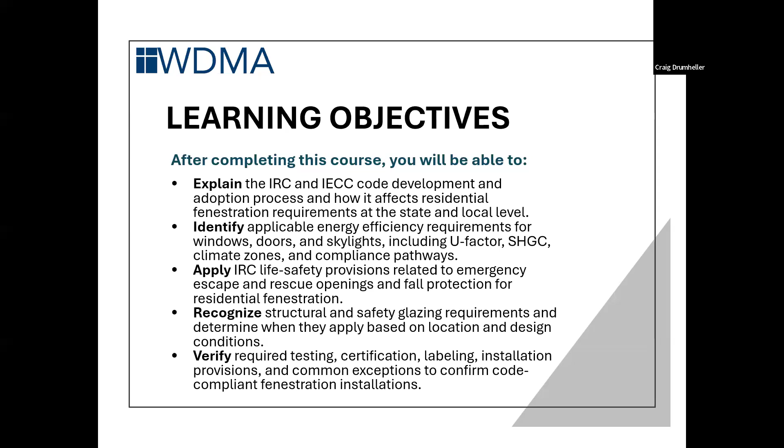The IRC covers 1 and 2 family dwellings. It primarily addresses safety, structural, and egress requirements, but it also has a Chapter 11, which is essentially the 1 and 2 family dwelling version of the IECC. However, the IECC is a comprehensive document that covers both the residential and commercial portions of the built environment. Typically, when a state or jurisdiction adopts an energy code on the residential side, they will strip out Chapter 11 of the IRC and insert the requirements from the IECC. They are virtually identical, but just enough different that they will create it as a separate requirement.

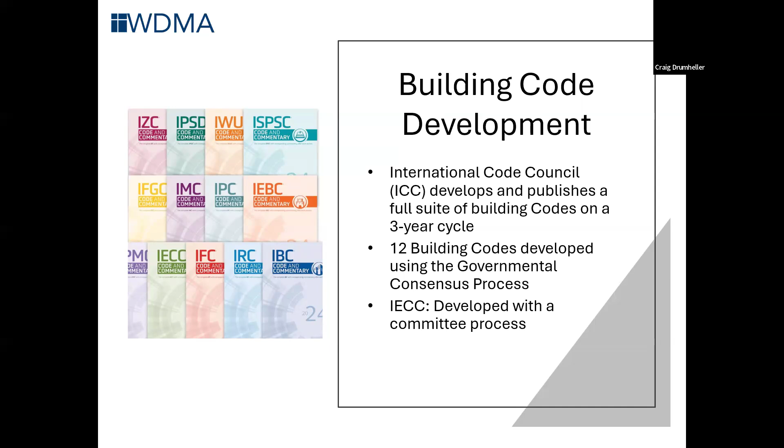The International Code Council develops and publishes full suites of building codes on a 3-year cycle. They have a total of 13 documents, 12 of which are developed using their governmental consensus process, which ultimately means the content is decided completely by governmental members, primarily code officials. The IECC, which is now going through its second iteration of the committee process, is developed with a committee that consists of code officials and professionals in the industry.

Codes are adopted throughout the United States, and primarily the building codes consist of the I codes, the ICC developed building codes. Most states update their codes every 3 to 6 years, and each state adopts building codes independently with its own process. Some are purely legislative, some are regulatory, some are a combination of regulatory getting finalized through a legislative process, but each state has its own code adoption process.

Adoption processes typically take from 2 to 5 years from publication, as you can see with the 2 figures on the left, the upper one being the IECC and the lower one being the adoption of the IRC. The darker colors show the more recently adopted codes, and the lighter colors are codes that are either the 2009 or the 2012 versions. The grayed out states are states that do not use the I codes, at least for those particular versions.

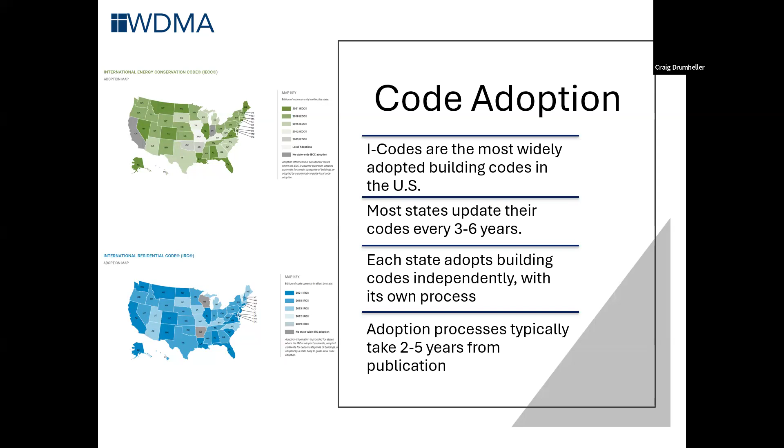The topics that we're going to cover today in the building code are energy, egress, emergency escape and rescue openings, fall protection, and safety glazing.

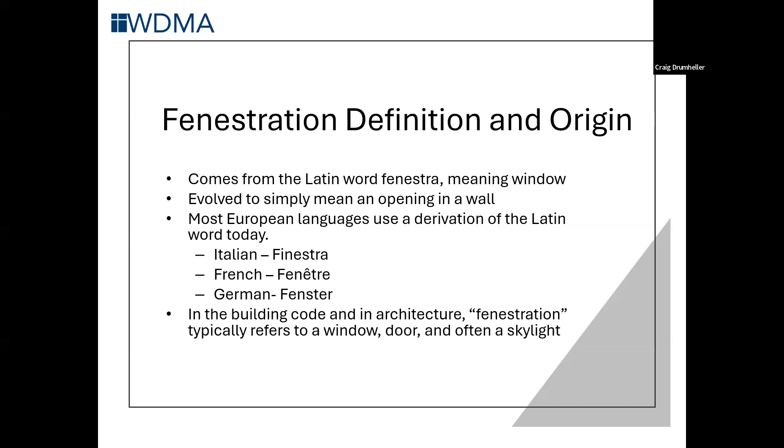I wanted to start out with the word fenestration. A lot of people hear that term and aren't clear exactly what it is or where it came from, so just a quick overview. It comes from the Latin word fenestra, meaning window. It has evolved simply to mean an opening in the wall. Most European languages use a derivation of the Latin word today: the Italian word is finestra, French is fenêtre, and German is fenster. In the building code and in architecture, fenestration typically refers to windows and doors, and often skylights. In today's context, it will include skylights as fenestration.

So the energy codes - there's the IECC, which we're going to be talking about today, the commercial code, which consists of commercial buildings and residential buildings 4 stories and above. The residential code covers single family and townhomes, as well as low-rise multifamily residential.

So when we're talking about the residential IECC: single family, townhomes, and low-rise residential, meaning 3 stories or less. In the IRC, Chapter 11 refers to 1 and 2 family homes, and a townhome is actually a single family home. Even though they're all in the same structure, each unit is considered a single family home.

Now, there's also ASHRAE 90.1, which has the same scoping as the IECC, but it is an independently developed standard. Both the IECC residential and ASHRAE 90.1 are referred to in EPCA, a federal statute using them as the benchmarks for state adoption.

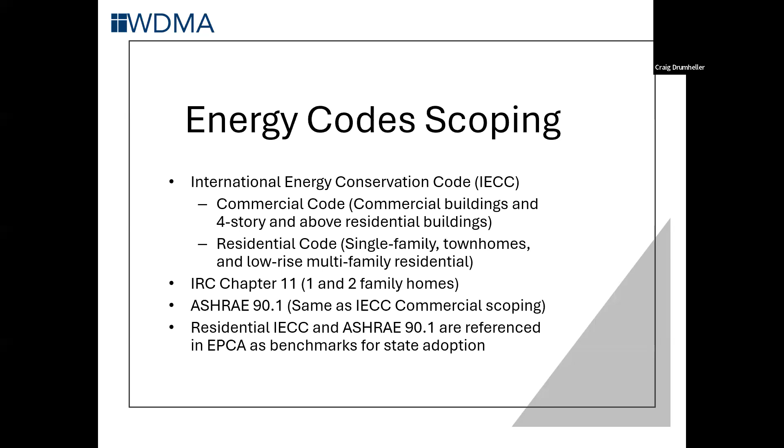Now, the first thing that people should understand with the energy code is that it's very climate dependent, and I wanted to put a calibration together for people to understand what climate zones mean what.

So here we have the lighter pink in the south, the Miami area, and the Brownsville, Texas area, just the very southern tip of Texas, and Florida and Hawaii. All 3 of those are the only places where climate zone 1 exists in the United States.

As you work your way north, the swath through around the Gulf of Mexico is climate zone 2. The orange is climate zone 3. Through the central United States in yellow is 4, 5 from Pennsylvania, Iowa, Nebraska, and 6 up in the dark blue. 7 you see in the upper north of Maine, Minnesota, and North Dakota, as well as the southern part of Alaska. And the very coldest climate zone is climate zone 8, which includes Fairbanks and points north where not a lot of people live.

So generally, southern climate zones are lower than the northern climate zones.

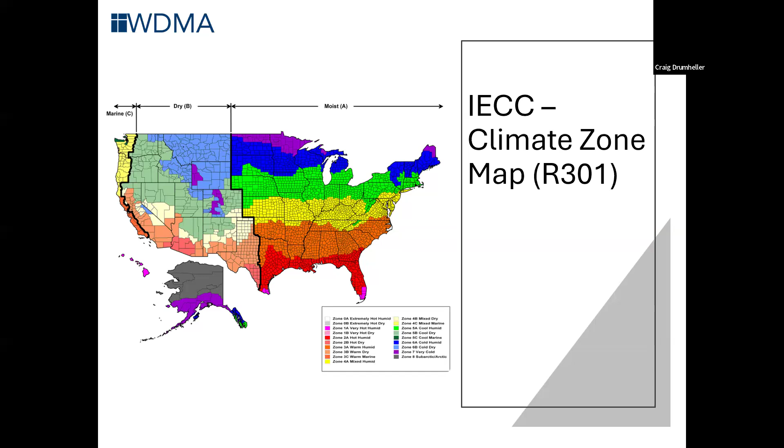So the compliance path - there's 3 different ways that you can meet the requirements of the IECC. One is referred to as the prescriptive requirements, which are very well defined with a little bit of flexibility, but not much to meet the prescriptive requirements.

The performance requirements need a computer simulation against a prescriptive home with the same geometry, so it will do the calculations. It compares the prescriptive requirements that are in the code with the actual specs of the house being built, and as long as it uses the same or less energy, it would be compliant.

And then there's also an energy rating index. Many people might know this as the HERS index, or from RESNET, the Residential Energy Services Network, which compares back to a 2006 home that has a reference score of 100. So a building code might have a requirement of a score of 56 or 52, and so essentially you're using half, a little more than half of the energy that a 2006 home might have used. So it's strictly a score of overall performance.

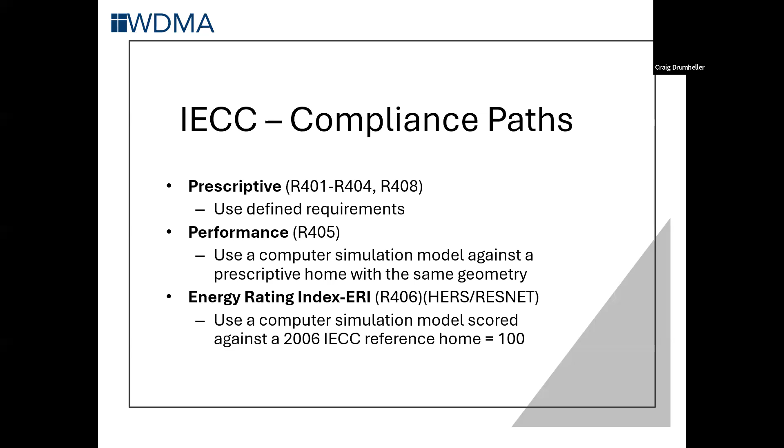So U factor is a measure of conductance. The lower it is, the more resistant it is to the movement of heat, unlike an R value, where the higher the value, the more resistant the R value is to the movement of heat.

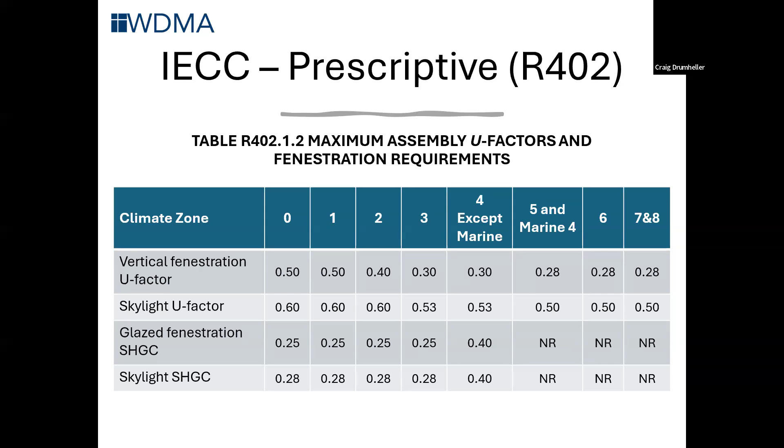Now, this is the only math that we're going to have for today, but in addition to those requirements, you can have specific.

So if you have a U factor of 0.25, and you have some windows that are higher than that, which wouldn't comply on their own, you can use what they call area weighted averaging, as long as you have enough offsetting it that are higher performing than the lower performing one.

As long as that weighted average is at or below the prescriptive requirement, you can still comply using the prescriptive approach. This is just simple math: double hung windows, 120 square feet at a U factor of 0.3 gives you an area U factor of 36. The same with the casement window of 40 square feet, U factor of 0.28, giving a U area of 11.2, and the glazed doors, U area of 12.8, summing to 60 over 200 square feet.

And if you look over here, you have the 200 square feet, now you have an effective U factor of 0.3. So if your target was 0.3 in your prescriptive requirements, this particular set of windows and glazing would meet that requirement.

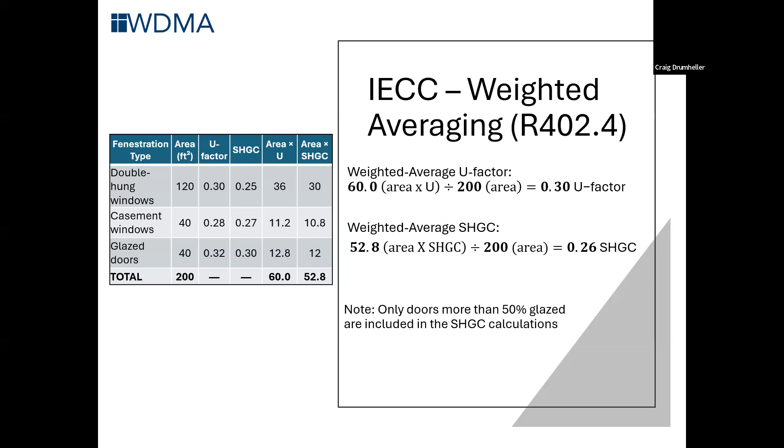Now, the IECC has also set up some hard limits for fenestration, meaning you can't go above the values set here. If you're in climate zone 0 through 3, you can't have a solar heat gain coefficient above 0.4, or in climate zones 4 and 5, you can't have a U factor above 0.48, or in climate zones 6 through 8, 0.40.

And these are weighted averages, and it applies to the performance path as well as the prescriptive path, and does not apply to the RESNET path.

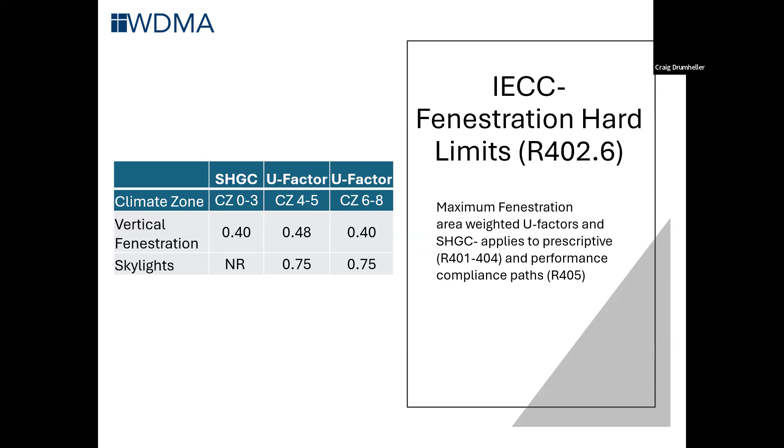Now in windows, you'll typically see this label called the NFRC label, and it shows the energy performance of the window. In this particular case, this is just a generic NFRC label with a U factor of 0.35 and a solar heat gain coefficient of 0.32, as well as some other specifications: visible transmittance of 0.51, a condensation resistance on a scale of 1 to 100, and an air leakage rate.

It's not a specific value, but it shows it is less than or equal to 0.3. Now, if you do not have this label, and this is written into the code, you must use what they call default values. These default values are not very generous, so you would have extreme difficulty passing code with windows that are not labeled with the NFRC label.

Here you can see that the U factor of a metal window, single pane, is 1.2, or even a double pane is 0.8. So at 0.8, you are more than double, almost triple the conductance permitted in most places in the United States. So to comply, you're much better off with windows being labeled with the NFRC label.

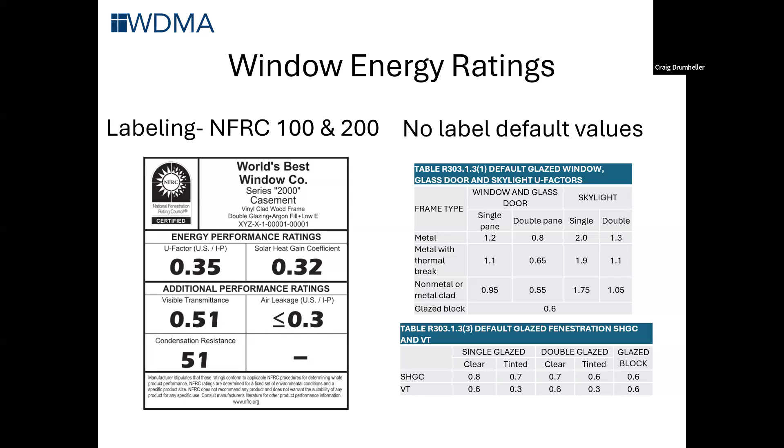So the IECC has installation and air sealing requirements. This is part of a much larger table, but I just wanted to extract the portion that applied to windows, doors, and skylights. It essentially says use the manufacturer's installation instructions, and this is true of creating the air barrier while installing, as well as insulating around the window and the window gaps.

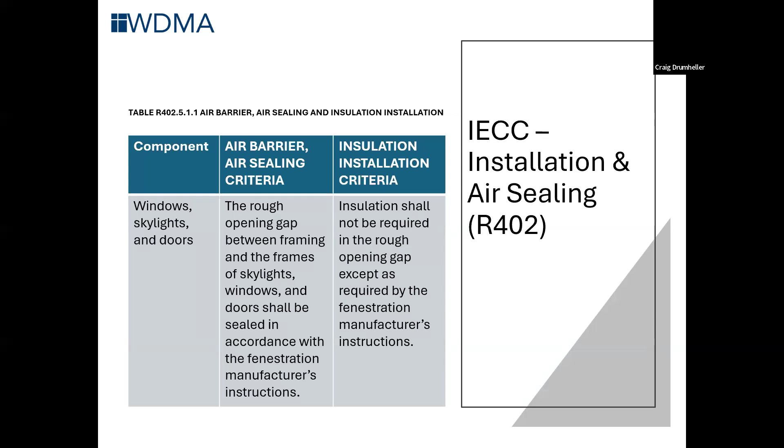So in building codes, typically the manufacturer's instructions would override any of the requirements that are in the code, or where the code is silent.

Now, air leakage. The fenestration air leakage for windows and skylights is limited to a cap of 0.3 CFM per square foot, which is actually the number showing on the NFRC label. So there you can show compliance, and it shows it is less than or equal to 0.3, so it just meets the requirement. It may perform much better, but frequently that is what you will see on these labels.

Now, if you have a swinging door, it's a slightly higher requirement at 0.5 CFM per square foot, and that should also show up on the NFRC label for a window or for a door.

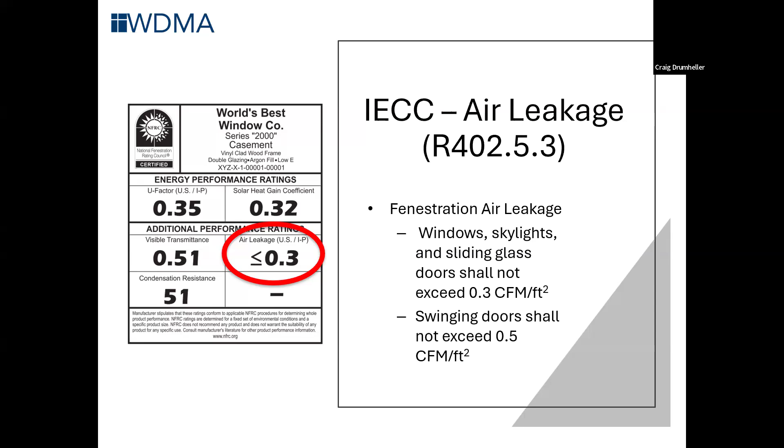Now, the IECC has some exceptions and other requirements worth mentioning. The prescriptive requirements apply to replacement windows and doors. So if you're getting replacement windows, you're essentially stuck either averaging the windows using a weighted average to get compliance, or every window must comply with the prescriptive requirement for your climate zone.

There are exemptions for historic buildings. You'd have to check with your local code department on how they interpret that. Some are national and state historically recognized buildings, and some are others that might be older, where they might provide an exemption. But before you purchase any windows, I would strongly suggest contacting your local building department.

In the prescriptive path, there's an exemption for 15 square feet of glazing where there isn't a U-factor or solar heat gain requirement. This is probably for decorative glass or some specialty window you may want to install. The same is true of a door in the prescriptive method—I believe it's 24 square feet of door area permitted to be exempt from the requirements. This could be a custom-made door that hasn't gone through the NFRC testing or some other testing that other products might be required to do.

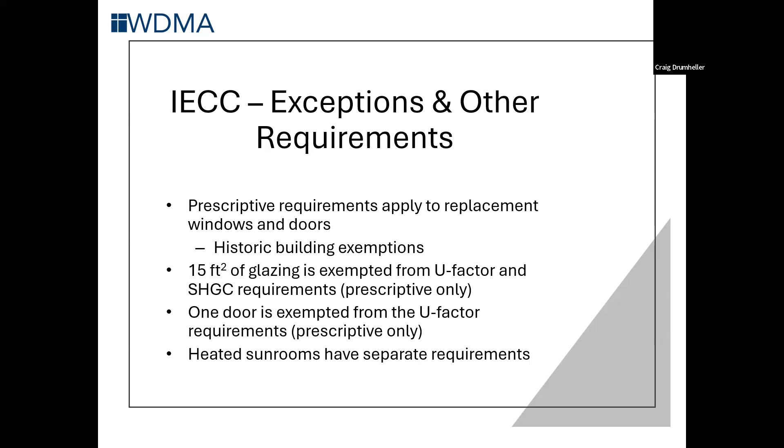Looking forward to where the energy code is going, there's a new category of energy credits that started with the 2021 code. It got a little more formalized in the 2024 code, and now I'm a member of the IECC residential committee, and we're taking it further in what's going to be published as the 2027 code later this year, with a higher level of requirements. It basically says you have to pass all of the prescriptive requirements and then do a little bit more, on the order of 10%, on these extra credit points that will allow for compliance in the prescriptive path.

There are points available for higher performing fenestration, so something to keep in mind if you're doing new construction.

There's also a stronger effort to get a net zero energy rating, and it's in Appendix RC. It's not prescriptive, and there's a lot of variance in design where people take different approaches. The 0.3 window was always very popular, but now when you're getting to net zero, somebody might want to rely heavily on windows, while others might use some other approach. So there's going to be more variance in design going forward as people figure out how to get these higher and higher performing homes.

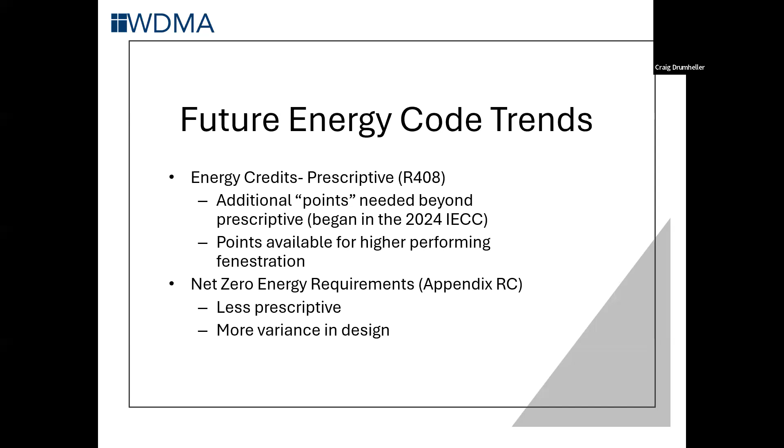Now on to the IRC. There's a lot of requirements for a lot of different products in Chapter 3, referred to as building planning. A number of items that impact fenestration are also contained within Chapter 3, and we're going to cover more detail on means of egress, EERO—which is emergency escape and rescue openings—as well as window fall protection and safety glazing.

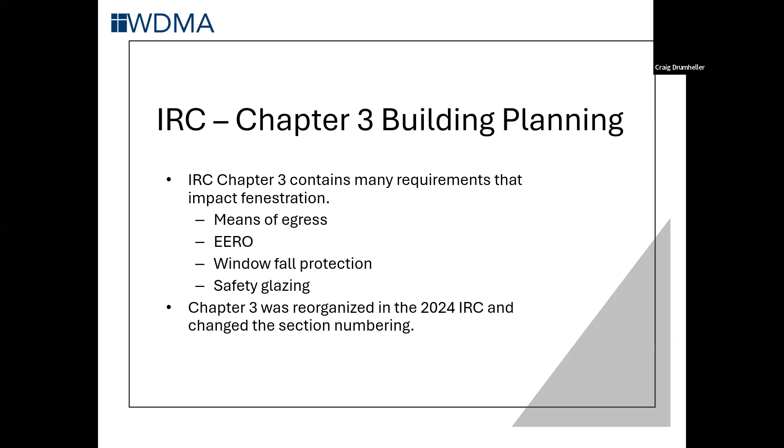Chapter 3 was reorganized in the publication of the 2024 IRC. So I'm going to show the different numbering for people who might still be on older codes, and also explain how it's contained in the newer edition if and when they move to the 2024 IRC.

We'll start off with means of egress. Each dwelling unit must have one unobstructed path to an egress door that gets you out into a yard or a public way. A door to a garage would not qualify, nor would a door to a deck that doesn't have egress to stairs. But again, it's only one door, and it must have a minimum width of 32 inches and a minimum height of 78 inches, a typical door height. It must also be openable without keys or special knowledge.

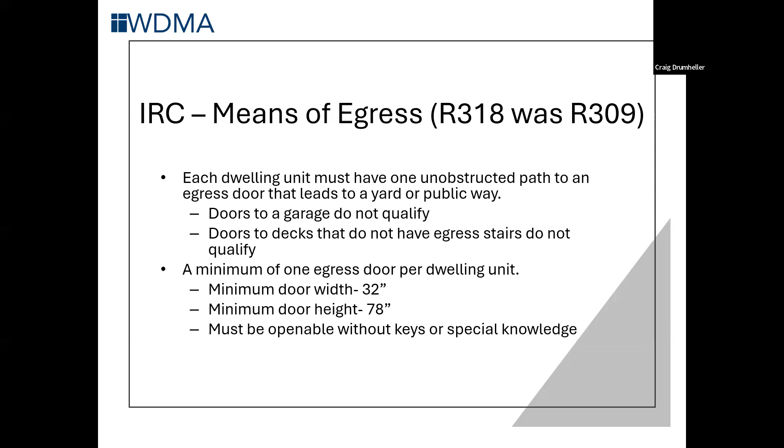That's a phrase frequently used when it comes to escape routes, whether it's egress—which we'll call a casual exit—as opposed to what we'll move on to now, which is an emergency escape and rescue opening.

This is more frequently referred to when you're talking about windows. It shall be provided, meaning if you have a basement, it must have an EERO. It could be a door, but it's got to have some way to get out, and it must meet all the EERO requirements. This is also true of a habitable attic, and every sleeping room must also have an EERO.

Must have this emergency escape and rescue opening. To be able to get through this opening, it must open from the inside, again without the use of keys, tools, or special knowledge. It must have an opening control device or fall protection, which we'll talk about, and must meet minimum dimensions.

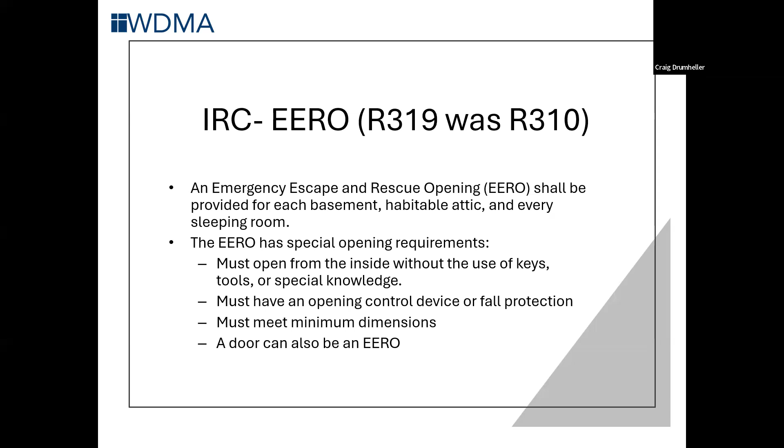So the window opening control device, or WOCD, must be compliant with ASTM F2090, and this will be labeled on any window that is compliant as an EERO with a WOCD. The definition used to be contained, or still is contained, within F2090, but in the 2027 IRC it will also have this definition directly in the code, showing the three primary uses or functions required of an EERO or WOCD.

First, the opening stops at less than 4 inches, meaning it will not allow a 4-inch diameter sphere to work its way through. This is a typical size used in a number of areas in the building code, including stair rail balusters, to make sure you don't have larger spacing so small children can't get through those spaces. It must also be releasable to fully open without tools, meaning it goes from that 4-inch opening up to a full opening to the required dimensions.

The two figures on the left show the top one as a horizontal slider, where it opens to 4 inches, and then where the red arrow or red block is, is where you would have the release that allows it to fully open. On the bottom, you have the double hung or single hung window, where you have these releases you've probably seen before that allow the window to fully open.

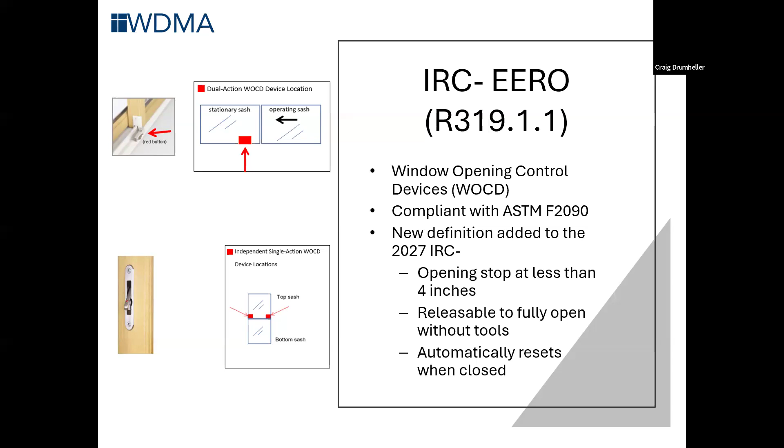It must also be able to reset when it's closed. As you can see with the double hung on the left, you've got that latch you can push to release, and then when the window goes down past it, it would pop back out into that position, not allowing the window to open again until it's once again triggered.

As for the actual dimensions, there are a few different requirements. The minimum width must be at least 20 inches, and the minimum height must be 24 inches. But more importantly, the overall openable area must be 5.7 square feet. So if you have a 20-inch width, you must have a 41-inch height, and if you have a 24-inch height, you must have a minimum 34-inch width to meet that full 5.7 square feet. The sill must be no higher than 44 inches in order to permit easy egress through the opening.

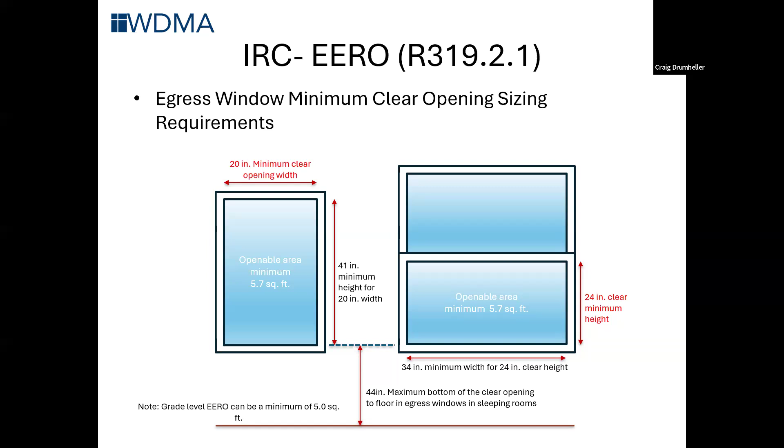And just a side note - if this window or EERO is on grade, the minimum gets reduced to 5 square feet rather than 5.7 square feet. If you are below grade, that 44-inch maximum still holds true, the 5.7 square feet still holds true, as well as the 20-inch width and the 24-inch height.

But there's also the well to consider. Since you're below grade now, the well must be a minimum of 36 inches by 36 inches. And if you are more than 44 inches below grade, there must be a ladder that allows you to get out.

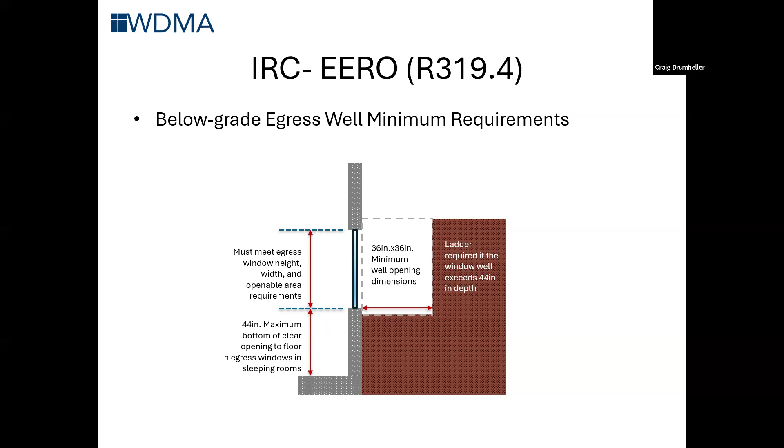Now, fall protection. There are requirements for fall protection if you have a window that is 24 inches or less above the finished floor and greater than 72 inches above the outside finished grade. So if you're in a garden-style apartment or split-level house, you might have windows less than 6 feet above the outside finished grade. But if it's any more than that, and you have a lower window, then you're going to need fall protection.

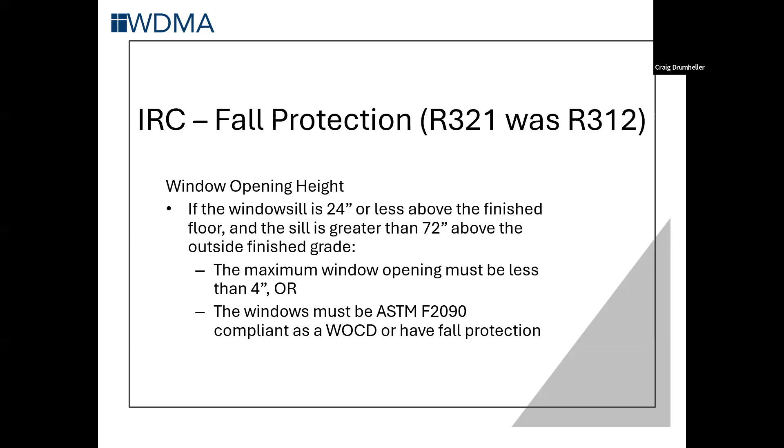Now, the fall protection can be provided in one of two ways: either you have the 4-inch stop on the opening, or you have a WOCD - this window opening control device - or you have other fall protection, meaning guards. If you have a guard, you've got to make sure that the window you're putting this on is not an EERO opening, because it would probably require special tools to get those guards off.

Now, glazing. There's a lot of different applications for glazing and different requirements on hazardous locations. The hazardous locations are defined for each one, whether it's in a door, near a door, near floors, glazing near floors and stairs, glazing in windows, and glazing in bathroom shower areas.

And if it's determined that it is a hazardous location, then it must be somehow compliant with ANSI Z97.1 or the Consumer Products Safety Commission's 16 CFR Part 1201.

And the typical way that they're compliant with these glazing materials for a hazardous location is tempered glass, meaning it's been treated, and when it breaks, it doesn't break in shards, it breaks into smaller pieces, so it won't cut like old glass might.

Laminated glass is covered in or coated with a layer, usually a kind of plastic, that's adhered to it and keeps everything together, or it's a plastic piece, and it doesn't shatter like glass does.

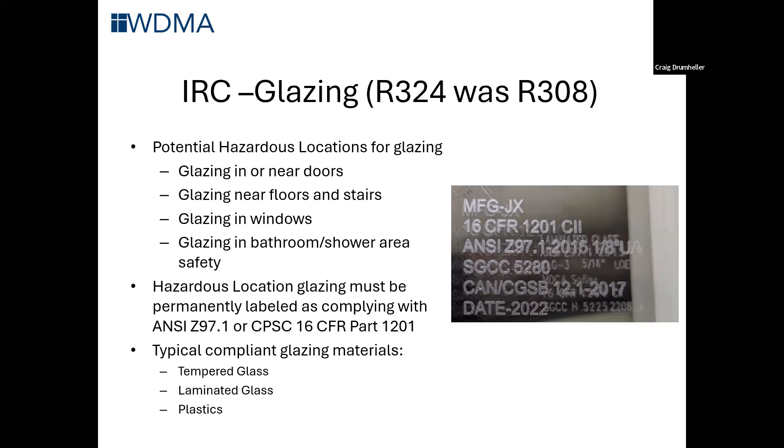So, glazing in or near doors: glazing within doors with areas greater than a 3-inch diameter, so anything essentially larger than a peephole.

If it's within 24 inches of a door — so not the door itself, but maybe a side light within 24 inches of the door — any part of the glazing within that distance means the whole piece of glazing must be safety glazing. Also, any part of the glazing less than 60 inches from the floor in the plane of the door. The example in the upper part of the drawing shows that the distance from the door and the height, both on the right and left, would need to be safety glazed.

Now, a little more complex is glazing within 24 inches and out of plane on the hinge side of the door. It's been determined that the latch side does not need to meet the requirement if it's out of plane, but on the hinge side it does, apparently because there's much more chance of breakage there. There's an exception: if there's an intervening wall between the door and the glazing, it wouldn't apply. But in typical cases, it would apply.

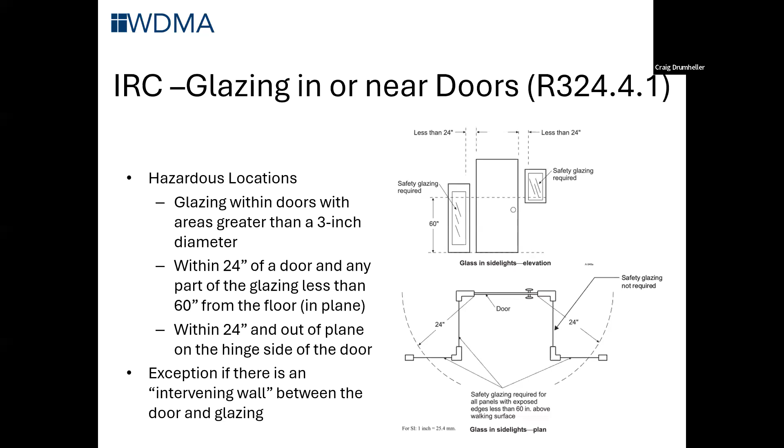Glazing in windows — all of these conditions must apply for it to be considered a hazardous location. The individual pane must be larger than 9 square feet. So if you have a double hung window and the whole window is greater than 9 square feet but each sash is not, it would not apply.

But it would apply if you have an individual pane larger than 9 square feet, the bottom edge of the glazing is less than 18 inches from the floor, the top edge is more than 36 inches from the floor, and there's a walking surface within 36 inches horizontally from the glazing. For example, if you have an open foyer on the second floor with a big picture window, that would not need safety glazing even if it met the other requirements, because there would more than likely not be a walking surface within 36 inches horizontally from the glazing.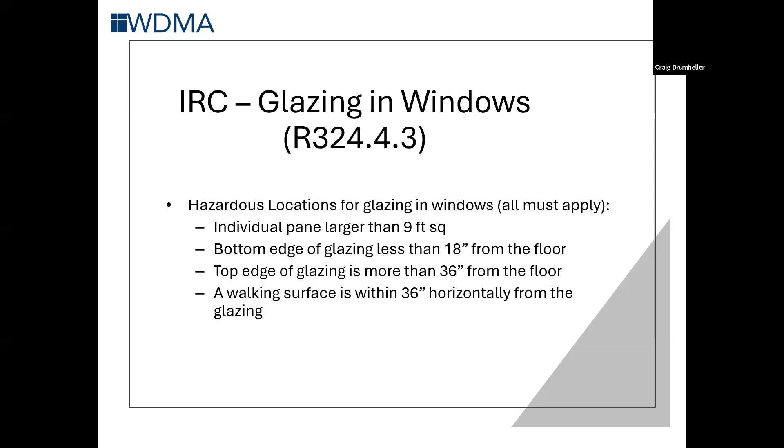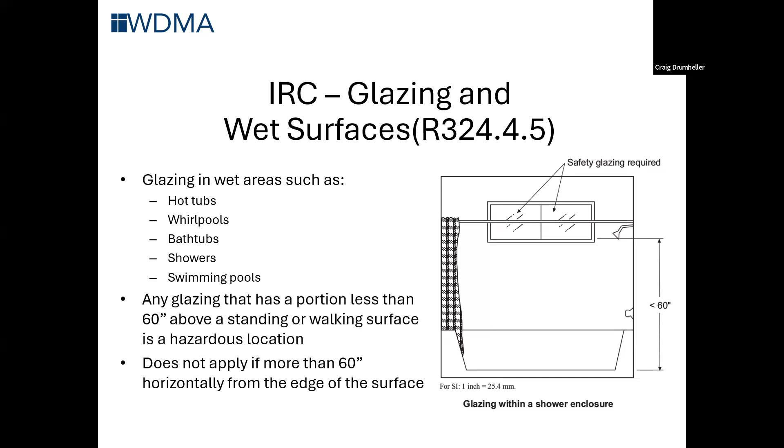Now with stairs — if you are adjacent to stairs and there's glazing, it's a hazardous location if the bottom edge is less than 36 inches from the walking surface, in which case it would be required to be safety glazing. There's an exception: if you have a handrail on that side that blocks the window at that 36-inch level, then you would be fine.

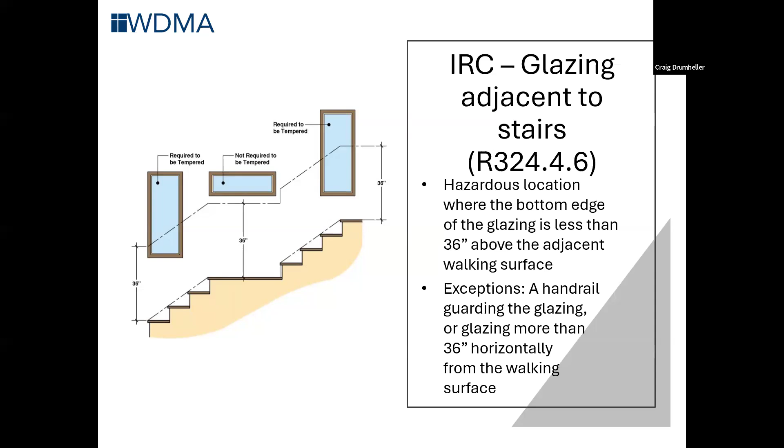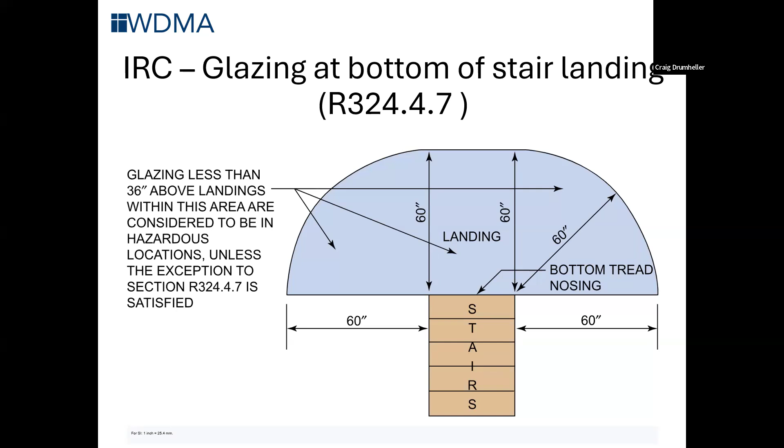So now the IRC, there's a lot of testing requirements and labeling requirements, and I want to run through that real quickly. So exterior windows and sliding doors shall be labeled for compliance with AAMA, WDMA, CSA 101, I.S.2, A440, also known as NAFS, or the North American Fenestration Standard.

Exterior side hinge doors shall be labeled for compliance with either NAFS or ANSI WDMA 100. So they have another method of compliance, so they don't need to be fully compliant with NAFS.

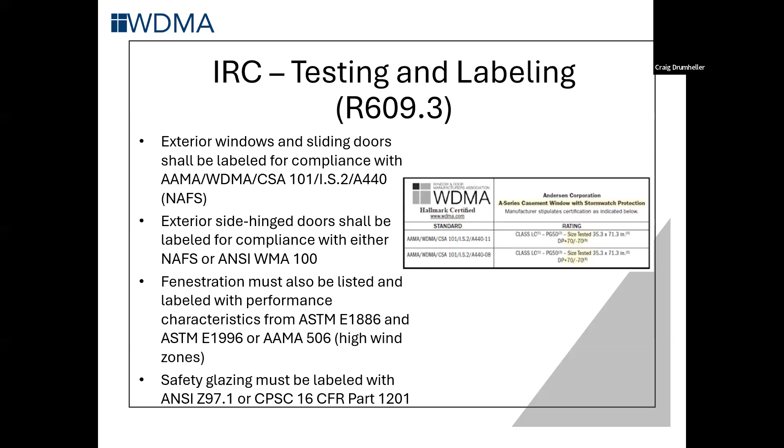Now, fenestration must also be listed and labeled with performance characteristics of ASTM E1886 and ASTM E1996 or AAMA 506. Those are for high wind zones, and I indicated we really aren't going to be covering that today, but wanted to mention that's another label that may be required based on your location. And of course, as I mentioned earlier, with safety glazing, that must be labeled with ANSI Z97.1 or CPSC 16 CFR Part 1201.

Skylights and sloped glazing includes unit skylights, tubular daylighting devices, and glazed materials with a slope of less than 60 degrees from horizontal. So that's the distinction between a skylight and a vertical fenestration, that 60-degree angle.

And the glazing materials in these skylights, tubular daylights, and any other glazed materials must be laminated glass, with thickness dependent on size, fully tempered glass, heat strengthened glass, wired glass, or an approved rigid plastic. And the trick to this is that screens may be required below the skylight in some circumstances, so you might want to check for those.

Most skylights today are made of materials in such a way that a screen is not required, but you might want to check just to make sure anytime you're installing a skylight.

The unit skylights on a roof require on the outside a 4-inch minimum curb just to prevent water from getting up over top of the skylights. And unit skylights must comply with NAFS and be labeled with NAFS, just as the windows and sliding glass doors are.

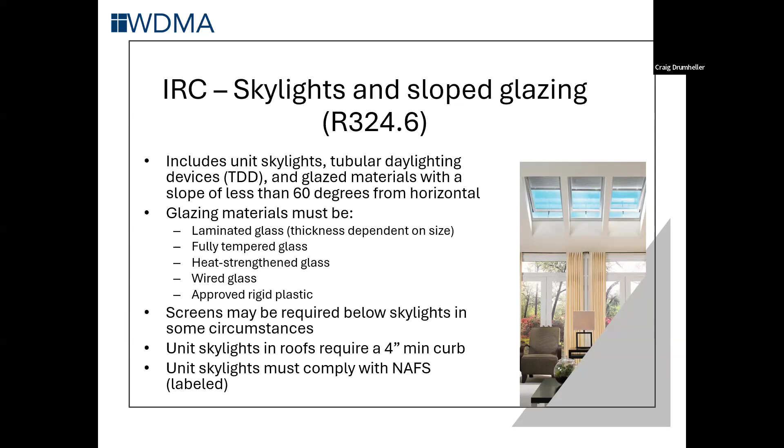So in summary, I'd say codes evolve. You need to stay up to date if you're using building codes, if you're out there in the field or you're specing products. Adoption and amendments vary by state and even jurisdiction. You need to check with the local code official if you've got any real questions on what might be required in that particular area.

Fenestration must meet energy, safety, and structural requirements. They're very complicated devices, some of the windows and doors, and they've got a lot of requirements to make sure that the people using them stay safe. The geographic location matters, whether you're in Key West, Florida, or in a high wind zone, or lower heating and cooling requirements, or if you're in Fairbanks, Alaska, or other places. So there's different requirements, and you need to make sure both structurally and with energy efficiency requirements that you're purchasing the right product that's going to perform the way it needs to perform.